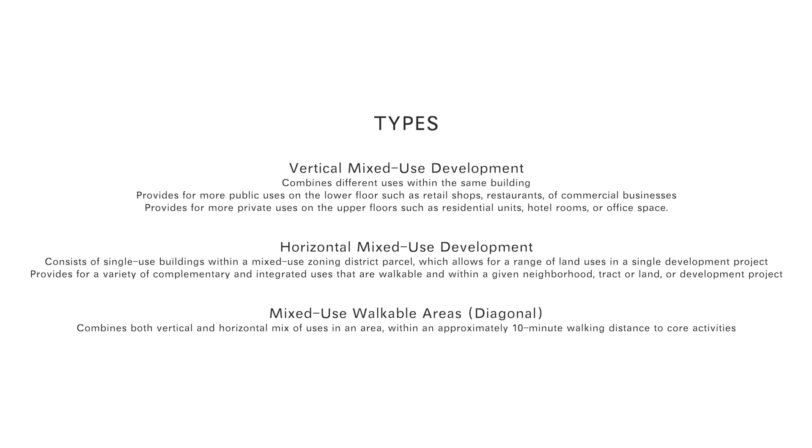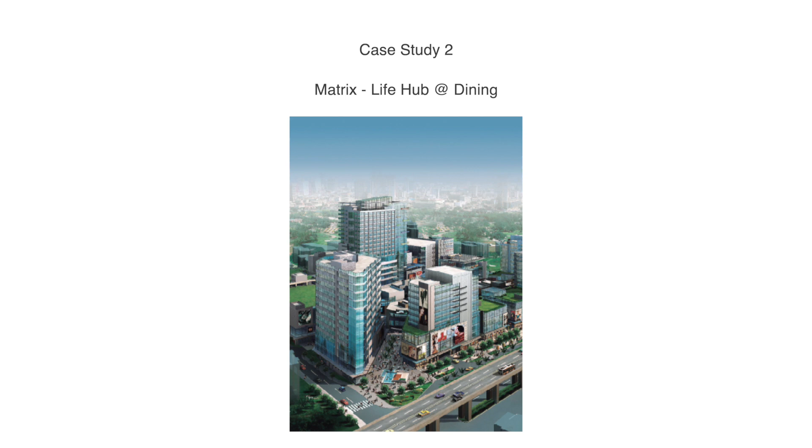Also, to understand more of such a development, we collected three different case studies in different countries and cities to solve the problems facing a specific community. We criticized the case studies by having positive and negative points and how we can reflect them in our project.

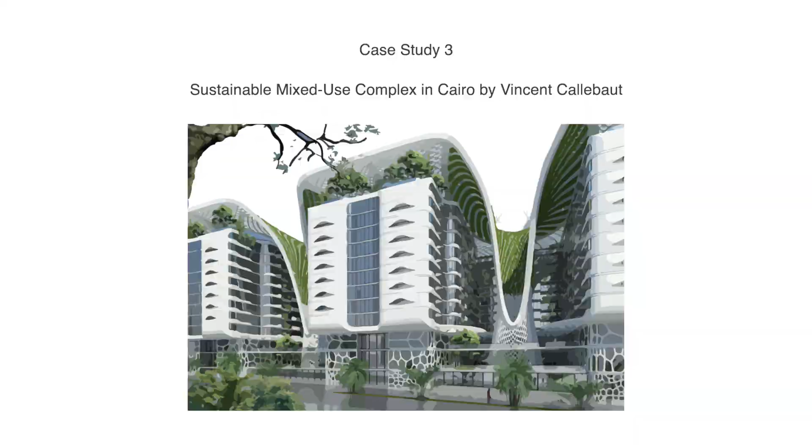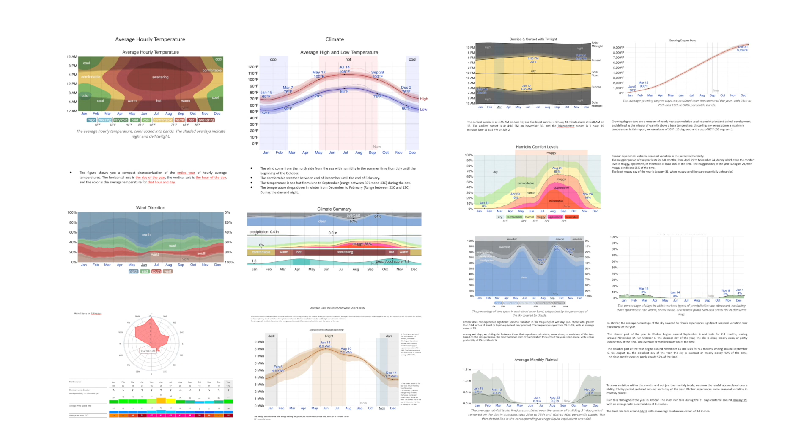We extracted climate information from Climate Consultant for our site in Al Khobar, and then evaluated the site in a matrix to understand the site more and to give a design response.

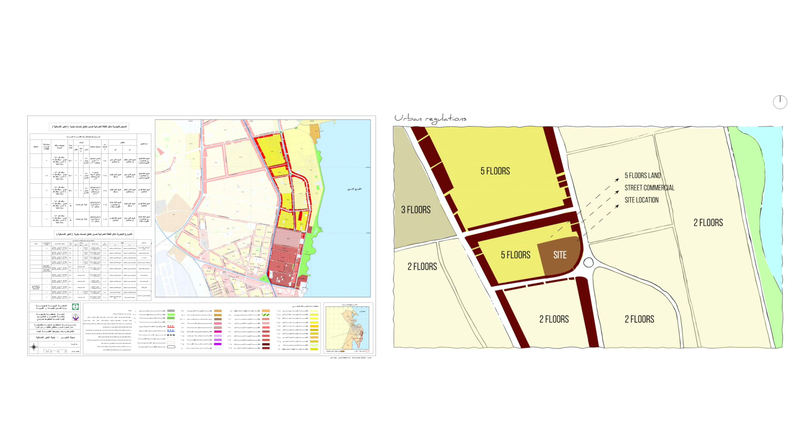The site sits in a humid city, 1.5 kilometers away from the sea, targeting the main roads, crossing a roundabout, and neighboring a residential complex development.

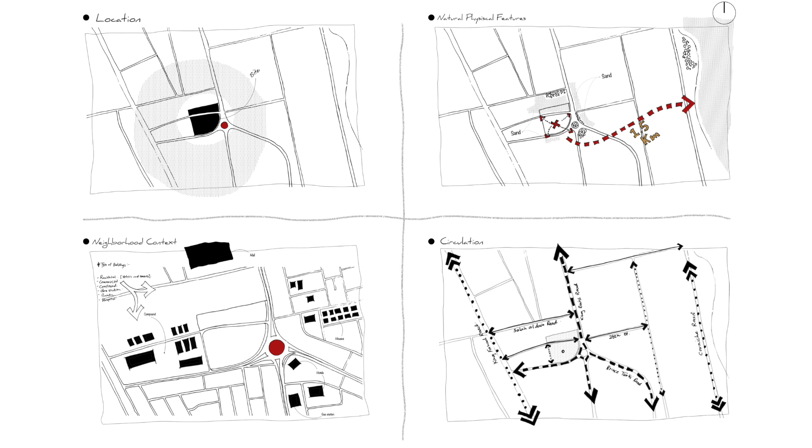The surrounding culture is mostly families living in villas. The noise disturbances come from different directions from the street, and the dominant wind direction is from the north side.

The literal meaning of cascade is a small waterfall falling step by step. However, the metaphorical meaning of that term is the passage of knowledge and inheritance, and that relates more to our concept because our concept relates to the social aspect of living and the passage of knowledge from one individual to another.

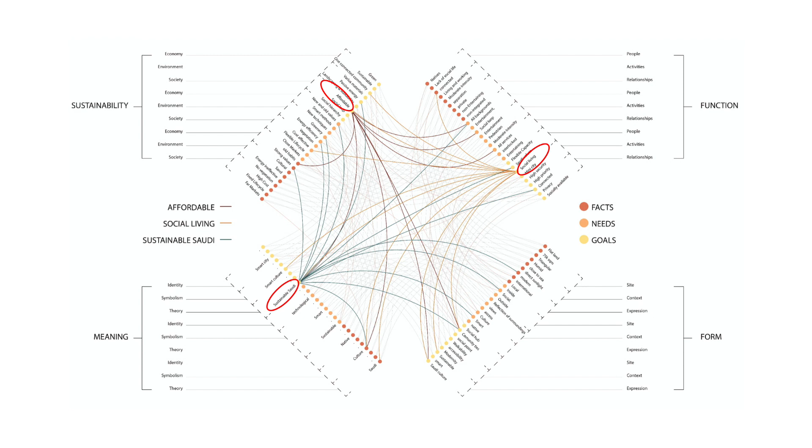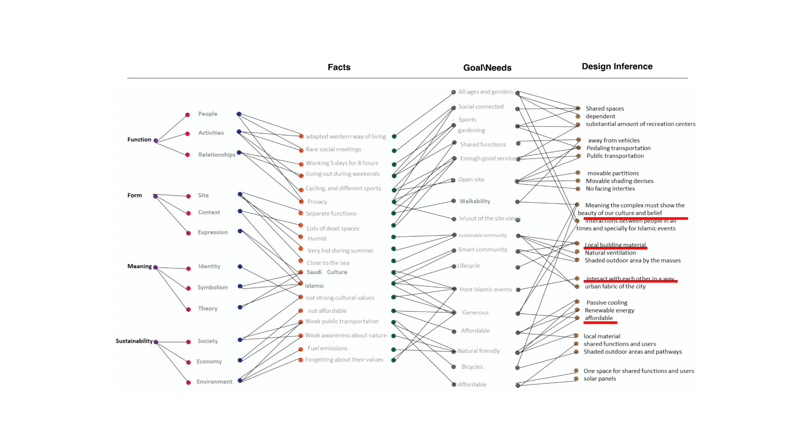Collecting ideas from early stages of this project and cross-referencing these diagrams have resulted eventually in creating what is called the Design Interpretation Table. In this project, we intended to increase connectivity and walkability. Therefore, we created a massive plate system that actually connects buildings.

As for the function, the main idea here was vertical zoning and private spaces, so we provided mid-rise buildings and private accesses to these areas. In the sustainability part, we wanted to save energy by a court system approach, so we created a hollow form in our project and connected systems into our plates.

We wanted the project to be meaningful, so we focused on three main things, which are affordability, social, and most importantly, the routine that the layout provides. The project is heavily dependent on human behavior and connectivity. Therefore, the term cascade was important, because the cascade is the passage of knowledge from one person to another.

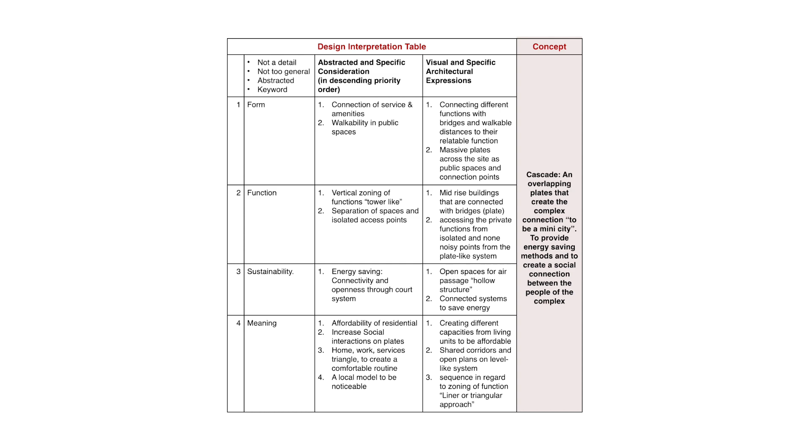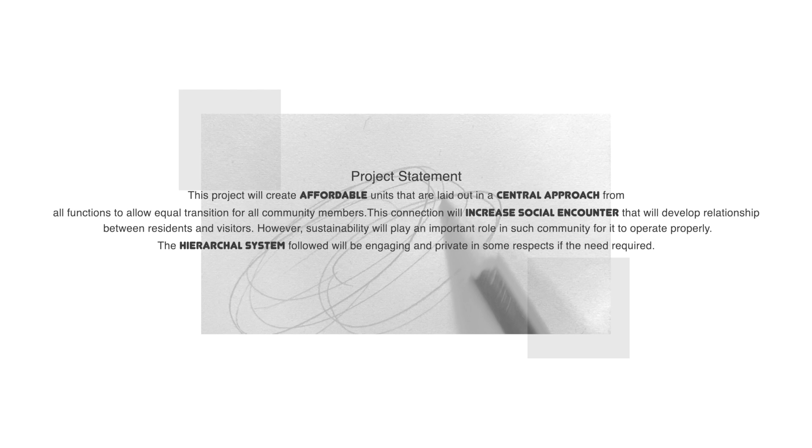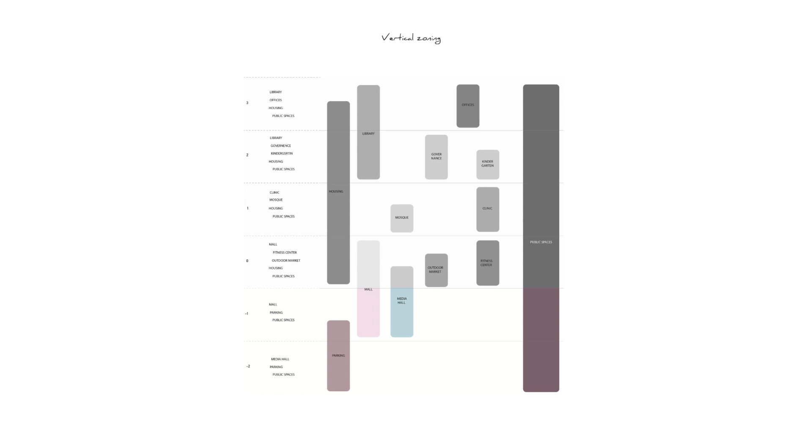Doing the mass model helped us to understand the spaces and how each building has a unique position that serves its purpose. As we mentioned previously, the vertical zoning is the main idea behind the project. In this vertical zoning, you can see the initial connection between the functions vertically.

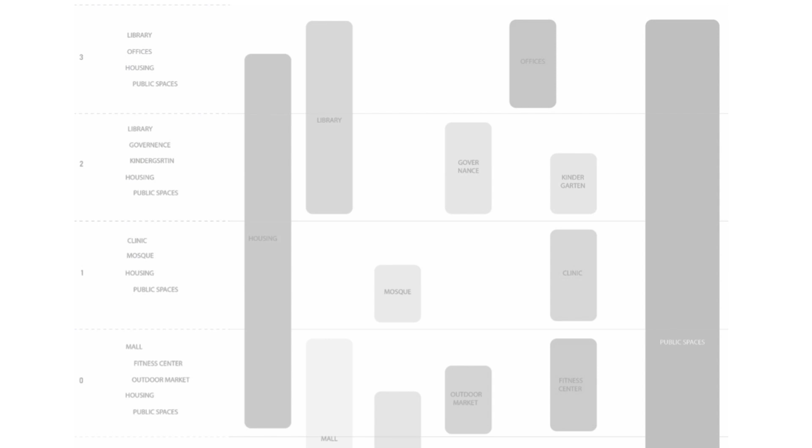Focusing on the movement with the different experiences is one of the main goals in this project. We did an enhancement for the whole project to make it more stable aesthetically and structurally, mainly by reversing the first process. So we started to design the buildings first, then designed the connections between them.

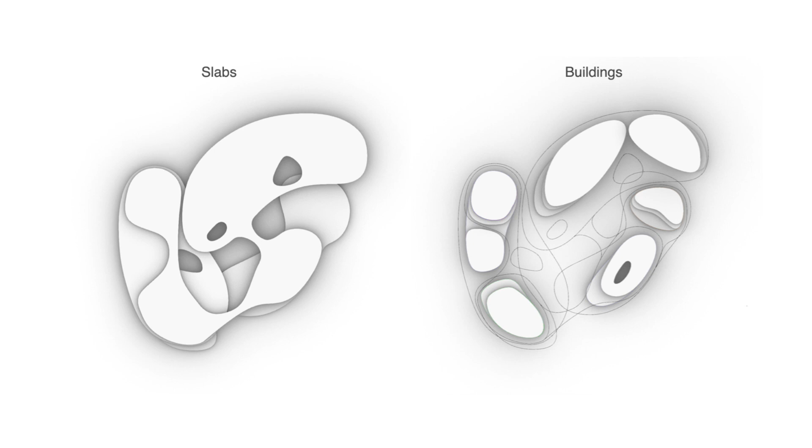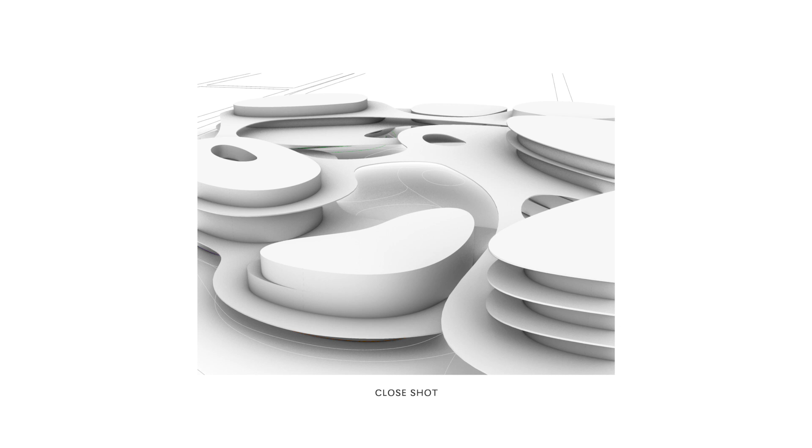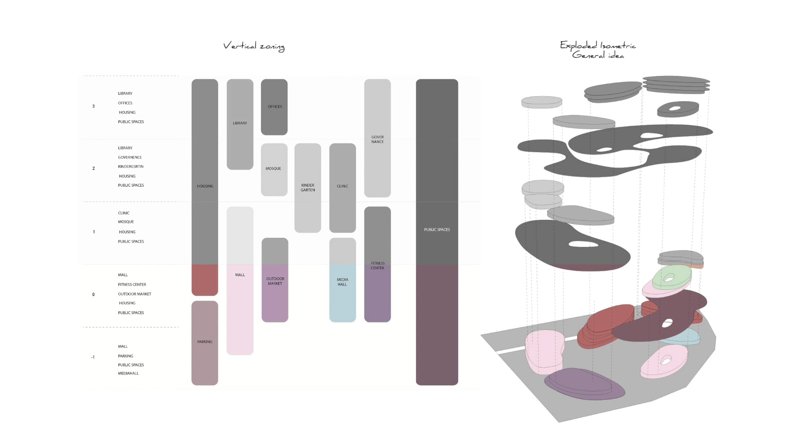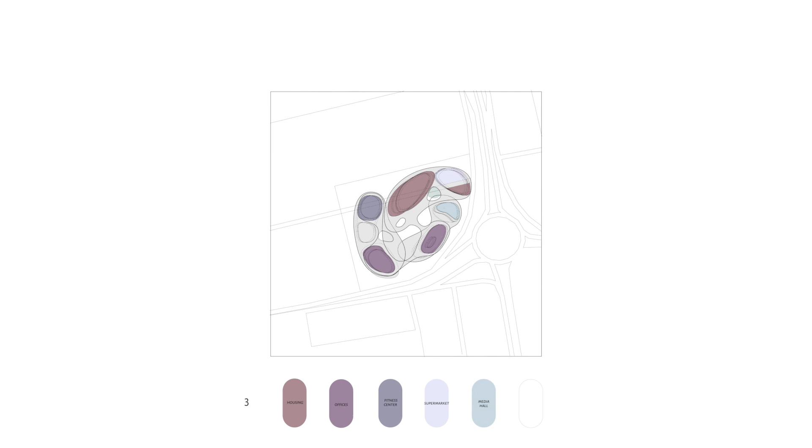In this part here, you can see how the vertical zoning has evolved and the horizontal zoning has become a reality. You can see the connection and the evolution between each layer and each floor. The project is becoming more private as we go up and as we move towards the northwestern part of our project.

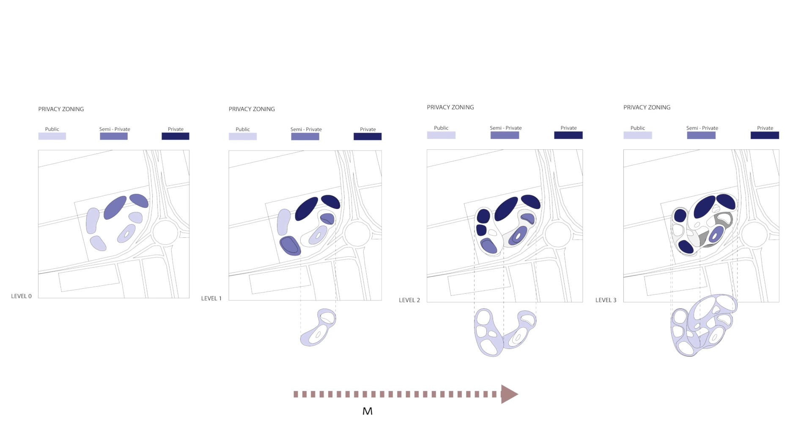The plate systems and the vertical mass system are generating the final shape of this project. However, the main emphasis here is on the sustainable approaches, which are the hollow plates and the air penetration movement that generate sustainability in this project.

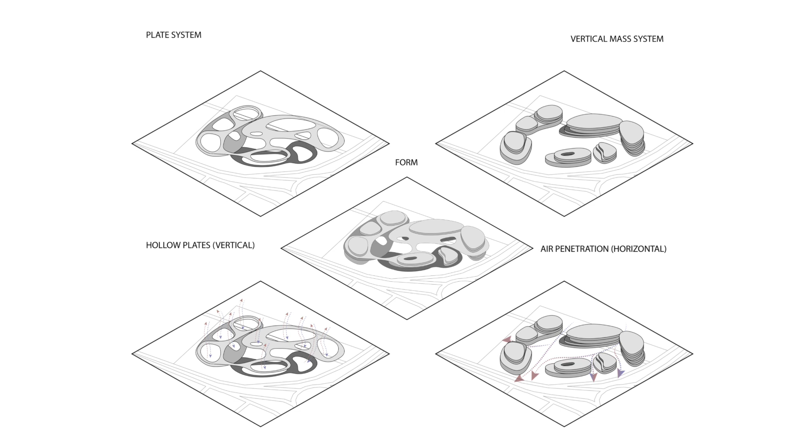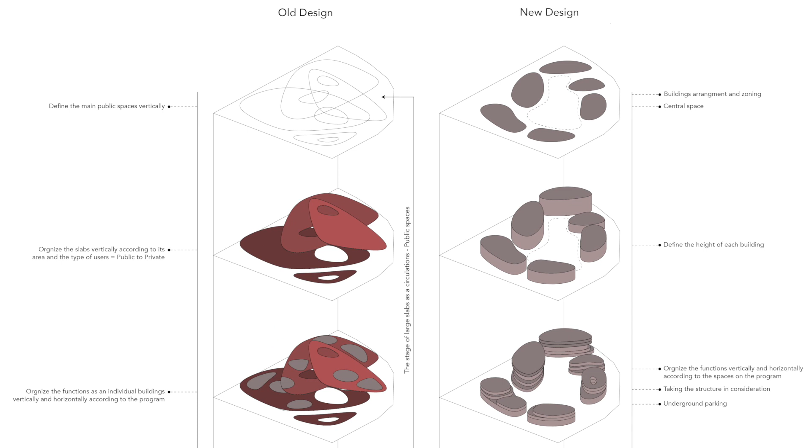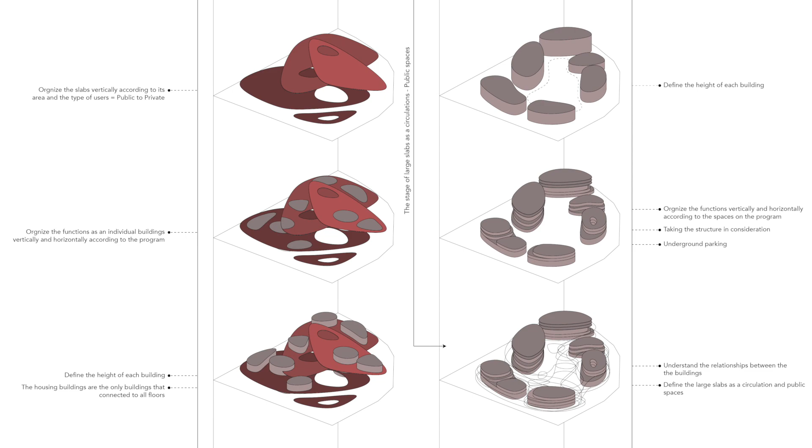The diagram explains the different process of the 2 buildings that we designed. The old one shows that we started with large slabs, then the buildings on top of them. So we faced the problem of circulation and the structure of the small buildings. So mainly it worked as a sculptural project. The second one is the enhancement, so we flipped the process and started designing the buildings first, then the public spaces.

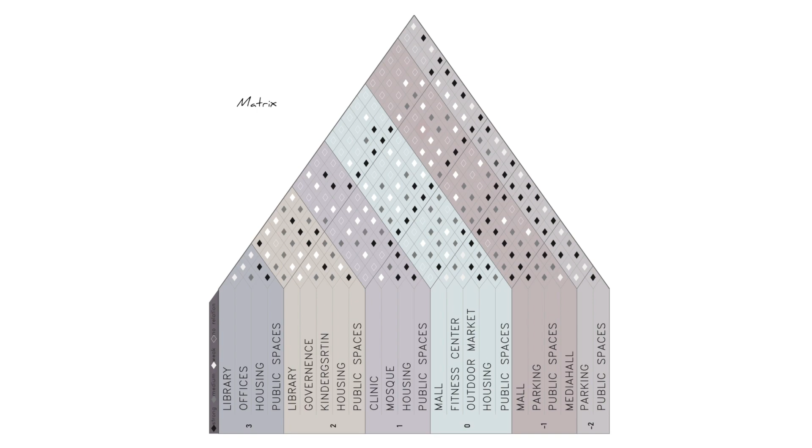We developed a simple matrix to understand the connections between one building and another, and a sophisticated one to understand the functions inside the buildings.

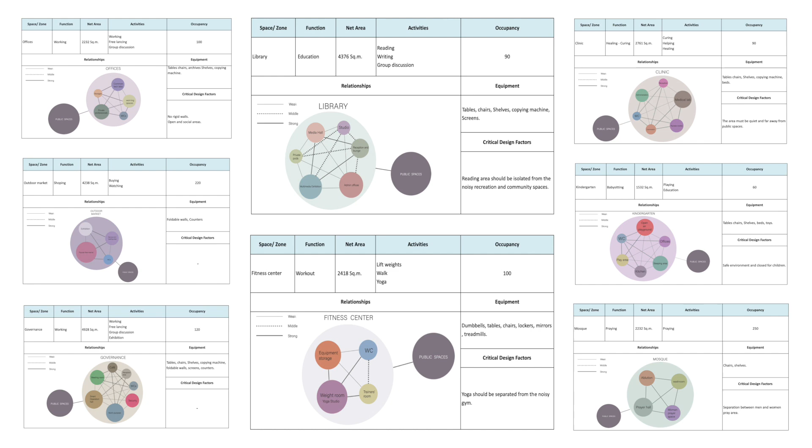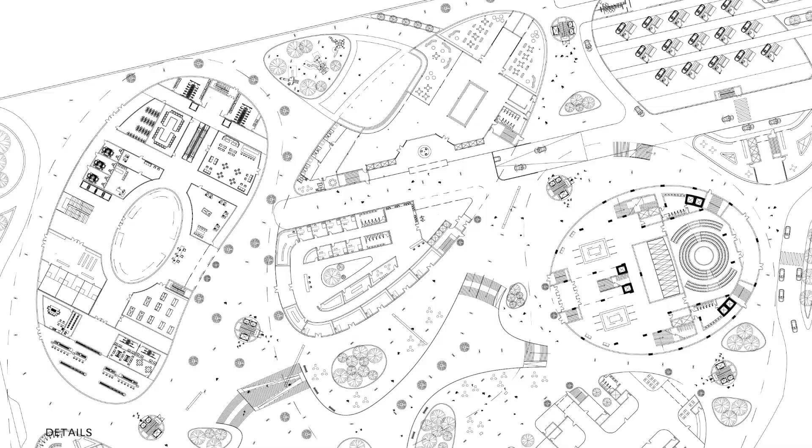In the underground floor, over 300 parking spots are preserved with a direct connection to the outdoor market in the middle. As for the ground floor, the flow of people is easily managed between buildings and through the outdoor markets.

On the first floor, you can see the connection between the mall and the multimedia throughout the plate and other masses. On the second floor, you can see how the plate interacts with the middle court of the project with a cafe placed on the edge.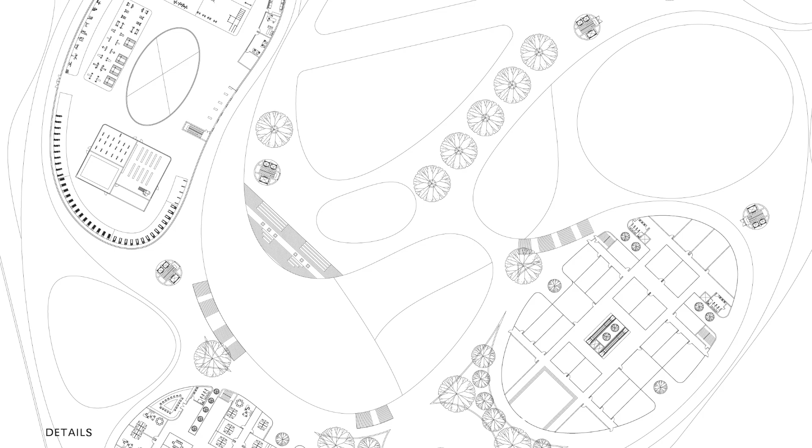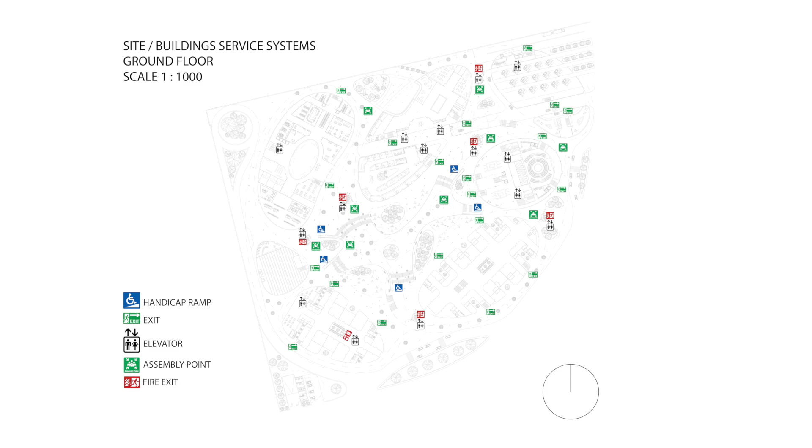The ground floor shows the connection and the flow of people on the larger plate. Ramps and vertical circulation points are placed around the site for easy access to all people.

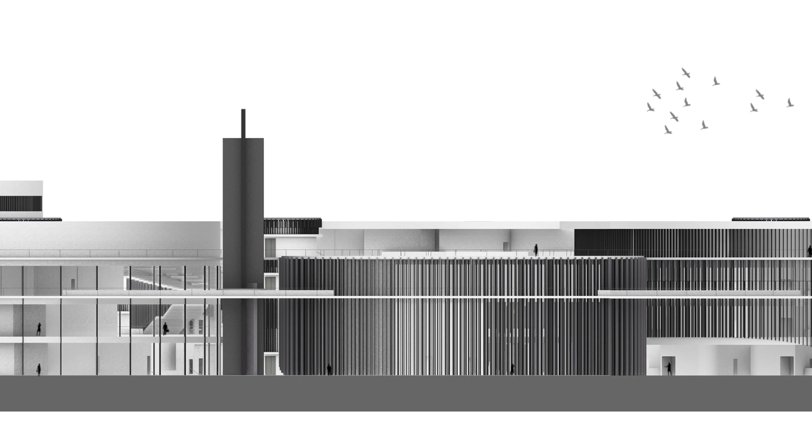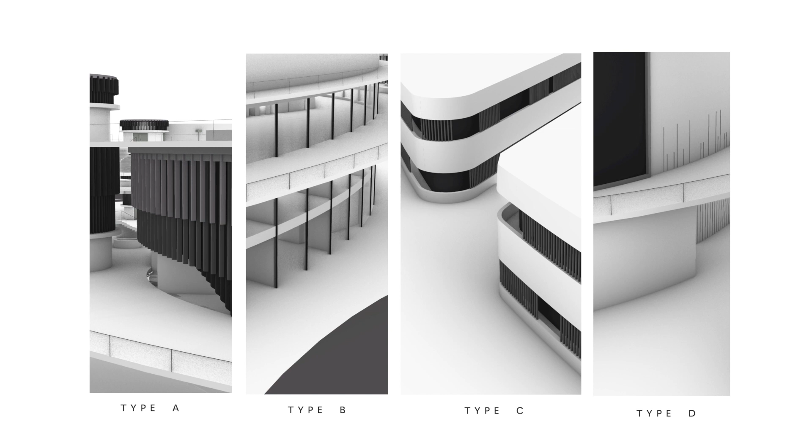We designed 4 different facades that have the same language, and for type A, we tried to create a unique treatment to reduce the excessive sunlight into the building.

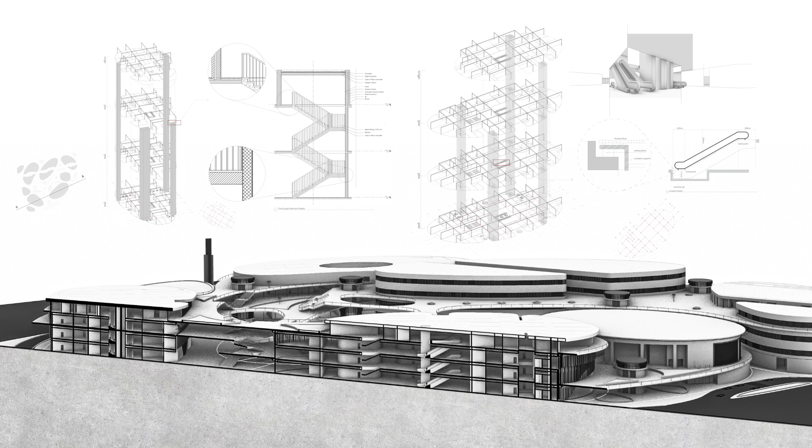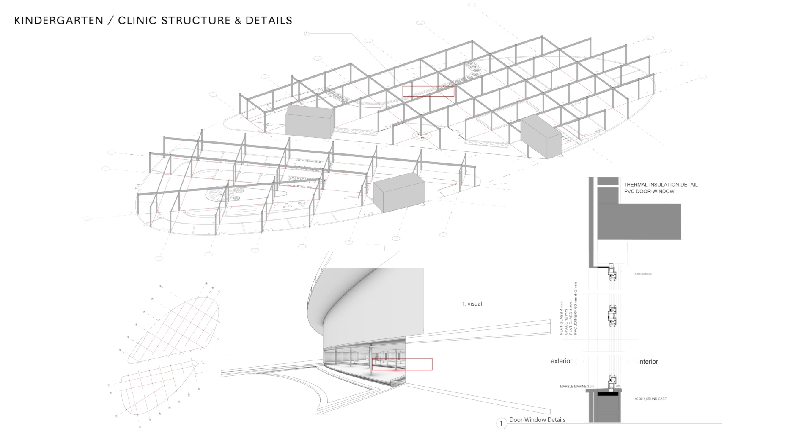For the structural systems, we provided detailed drawings for different elements, such as the emergency staircase, the elevators, the 3D truss system used for the theater to span 30 meters, and beam connections with columns.

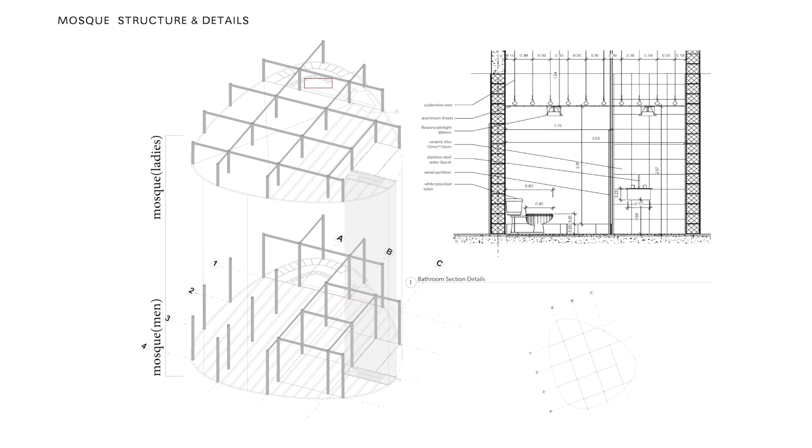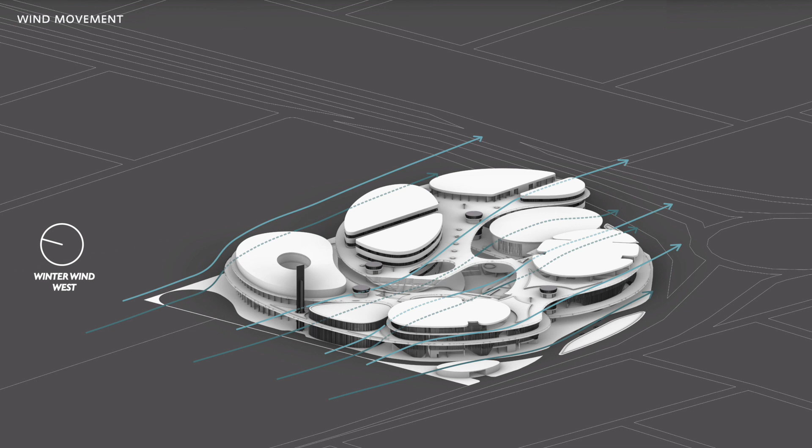The dominant wind directions are the north and northwest, but between July and August it comes from the east, from the seaside. To investigate the extent of the so-called Venturi effect, wind speed conditions in converging and diverging passages between perpendicular buildings are studied with computational fluid dynamics.

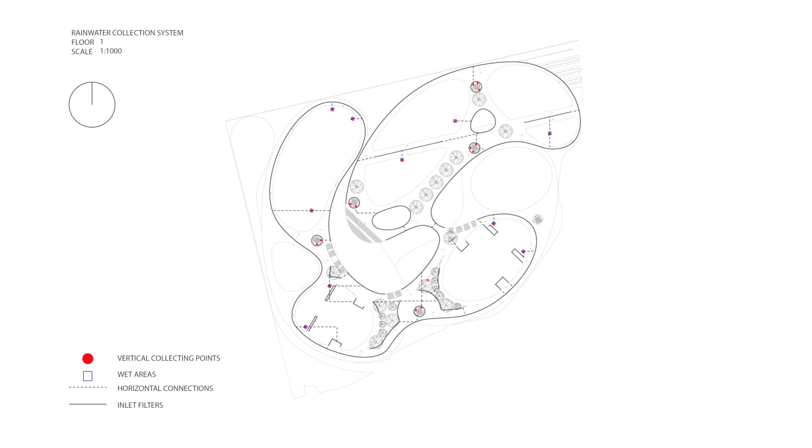Harvested rainwater can provide a source of alternative water to the compound. The major components of the rainwater harvesting system are the plates in this project, which work as the surfaces and gutters to capture the rainwater and send it to the storage system.

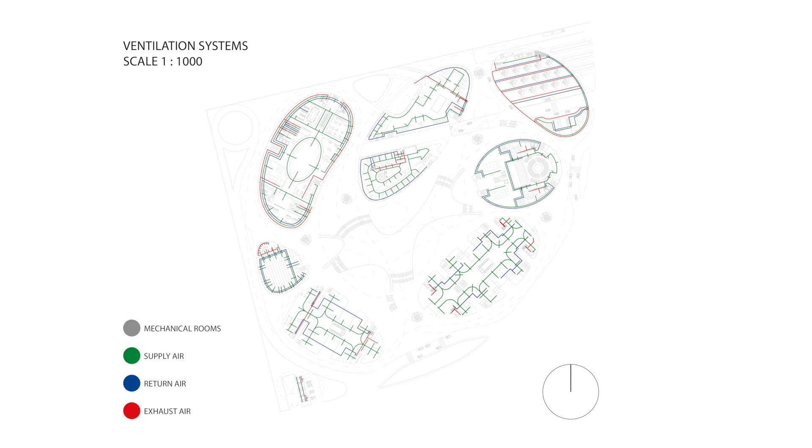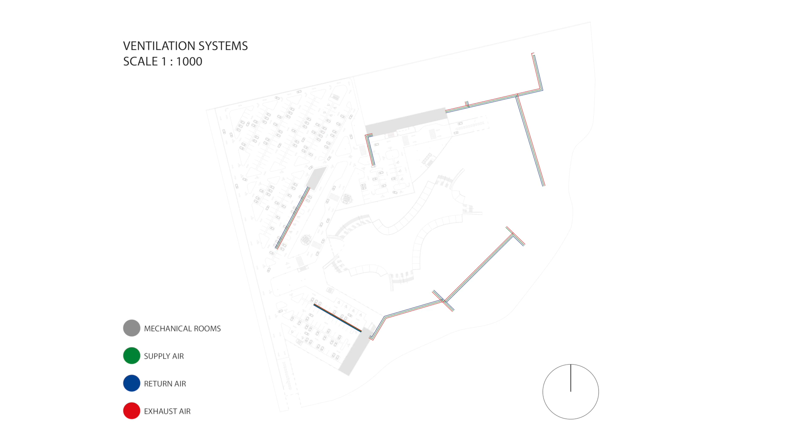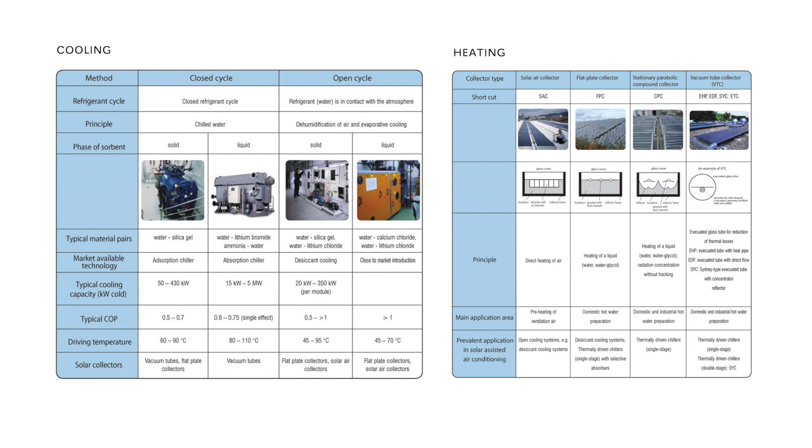Each building has a separate ventilation system, and that allows it to have its own separate and high-quality ventilation. 3 main mechanical rooms are distributed on the underground level, and they connect these separate systems into one. The refrigeration cycle uses solar panels or solar collectors as a sustainable method of ventilation in this project.

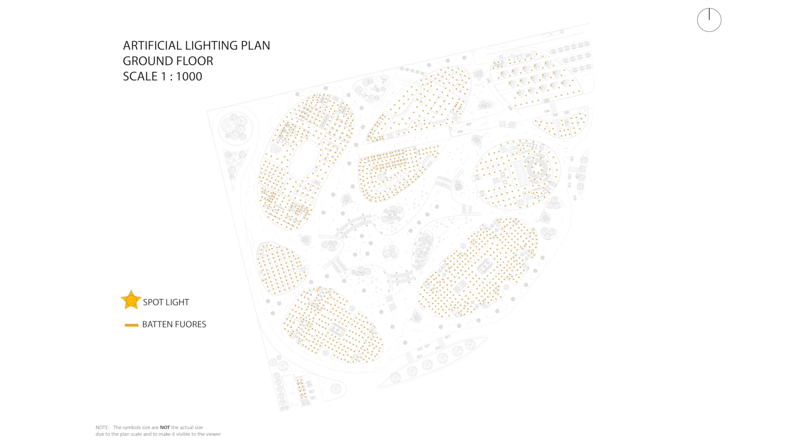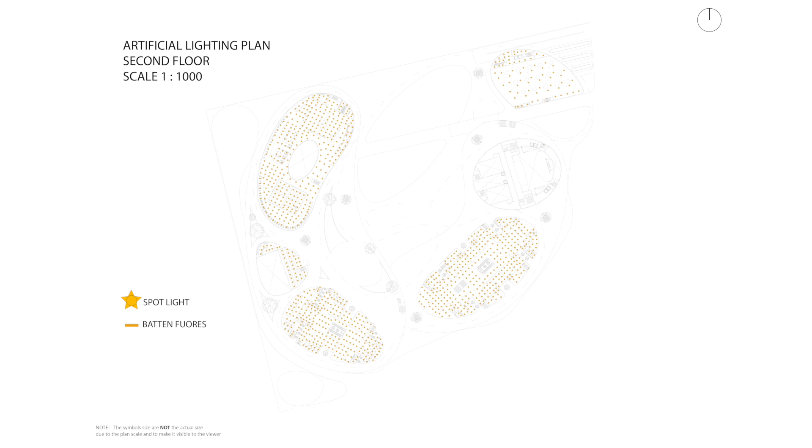Two types of light are used in the project, the spotlight and the batten fluorescent. We chose at least 3 different types of trees with a specific height, spread and irrigation system, and placed them carefully in each place in the project.